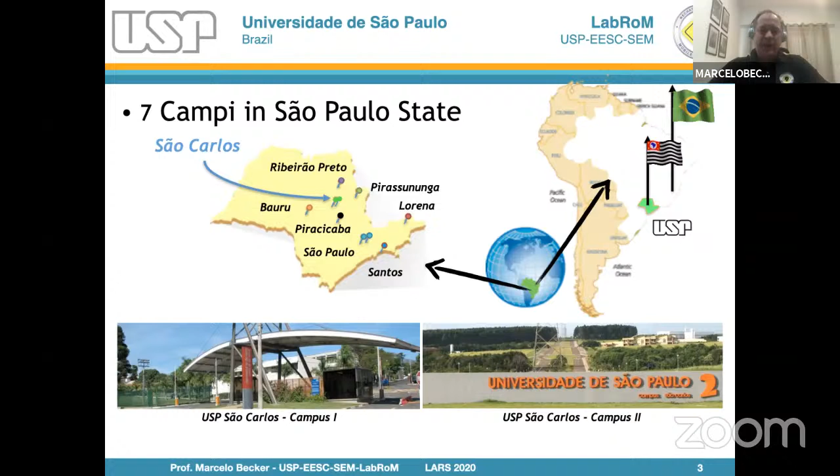Okay, so I'm from University of São Paulo. In the beginning of this presentation, you showed just a little bit of our group, so you can know that we are not in São Paulo City, we are in São Carlos, in the countryside of São Paulo State. We are like the rednecks. São Carlos is a very nice city, and we have around 30,000 students in the city.

And the most important thing is that we have a very nice ecosystem for innovation. This is great for us at USP and Federal University of São Carlos and so on. We like these transversal projects, and my group especially works very close to the Optics and Photonics Institute, CEPOF, from the Physics Institute. We are a technology pole, and many projects relate to innovation, lots of startups and so on.

I just want to show you that as São Carlos is a smaller city when compared to Campinas or São Paulo, things are very close, and we can work together easily with places like Embrapa and the Federal University of São Carlos. Here's a zoomed view. It's nice because if I want to have a coffee with my colleagues at CEPOF, it's like a 5 minute walk. To Embrapa it's like 10 minutes, and we can share ideas. And you know, coffee is very nice for good ideas.

Okay, so CEPOF is very important for us. It was a great opportunity for our mechatronics group to work together with CEPOF. Professor Vanderlei Bagnato is the chief of this group, and we work in this innovation area, trying to take this instrumentation to the fields and to apply them.

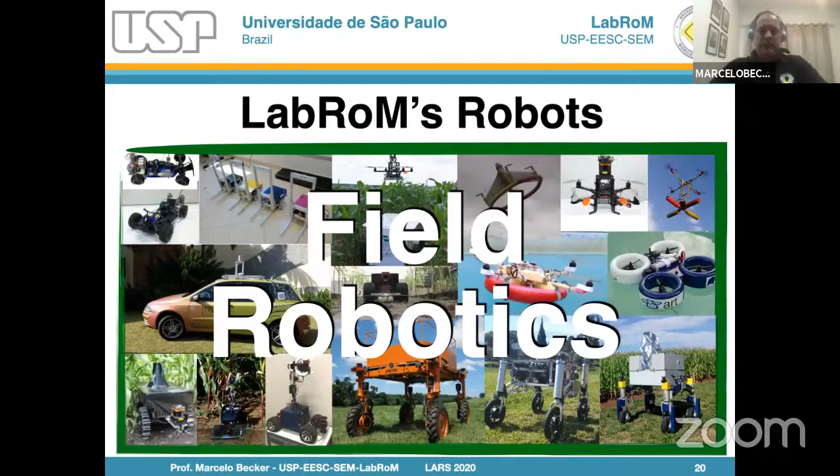And finally, what we do. In my group, we really do field robotics, and that's not easy. It's very hard to leave the lab, to go to the farms, or to run experiments in an outdoor environment. Most of you know that it's hard, but it's such a pleasure to have the students working together and getting good results.

Why do we do research focused on agriculture? Maybe the most important point is population growth. Today we have around 8 billion people living on Earth, but in 2050 this number will be very close to 10 billion. We need to feed everyone. According to the United Nations, we need to increase our food production a lot in the coming years to feed all these people. And increasing production doesn't mean increasing the production area, we need to increase productivity.

And we need to take into account climate change and environmental issues as well. In this scenario, robotics comes as a very important player. 5 years ago, we had around 800 million people who couldn't get enough nutrients to have a healthy life, and this must change. Otherwise, we are going to have big problems in a few years.

And it's not only about that, but also about business. Agribusiness is very big, very important in Brazil, so you can see the numbers here. I'm not going to go into details, but it's important to highlight that although Brazil produces lots of crops and grains, we need to import lots of goods to increase our productivity. So somehow, finding ways to improve and optimize the use of these goods would be great.

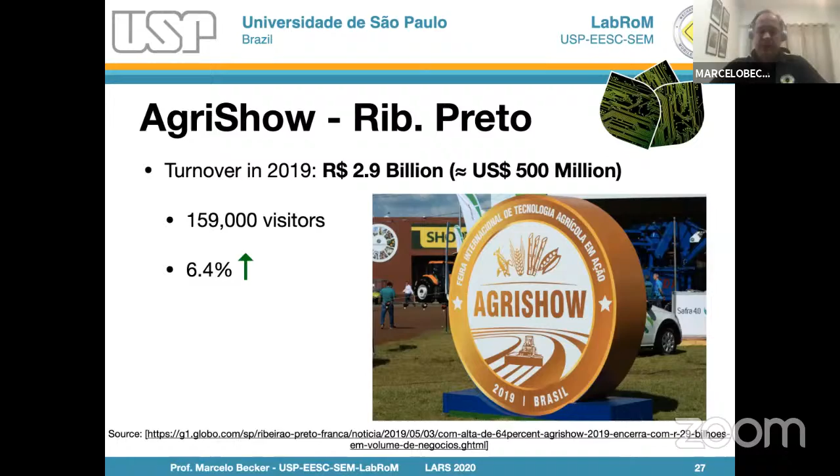Business also—we have in this region of the countryside of São Paulo State, Agri Show, the biggest demonstration and festival in this area in the country. Like in 2019, we had 2.9 billion reais in business, selling machines and other things. This year, unfortunately, we didn't have it. 2020, we didn't have Agri Show.

So I'm going to show you some difficulties that we can find in this area in agriculture robotics. First of all, we would like to have something like this: my scenario, I have some robots that are docked. I can provide energy for them using solar energy, send all the data to the cloud, process the data, and have feedback for the robots. I can connect everything. So this is what we would like to have. It's gonna take some time.

Probably in a few years this is gonna be a reality. If you have experimental farms where we are developing research, this is feasible to do. Here in São Carlos we have an experimental farm from Embrapa instrumentation, and like in ESALQ there are other experimental farms too. We can provide this infrastructure in these research farms, but it's not what's going to happen in the fields. If you go to Mato Grosso, Goiás, or other huge states in Brazil where we are producing lots of crops, it's not like this. So we need to increase and provide good infrastructure to have this scenario.

Taking into account this article from the Center for Digital Agriculture at Illinois University, we have here the levels of autonomy for ag robots, from level 0 to level 5. Today we start at level 0 and we are increasing the level. Level 0 is full manual teleoperation of the robots.

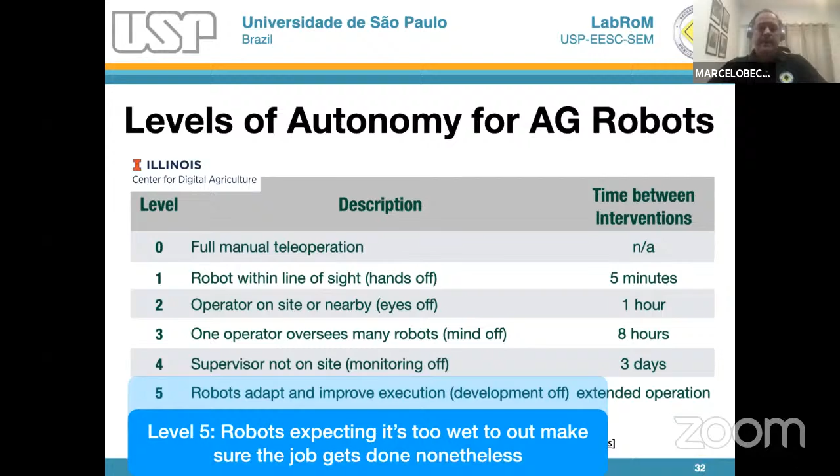But in this area we have some difficulties—let's say some possible obstacles. You can have power transmission towers, another vehicle in the middle of the way, buildings that were not mapped. Because of rain, you can have mud, erosion, and things like this that you need to adapt your path planner for, and so on.

So you can't count only on GNSS data. You need to have a good perception system to look around, check what is happening, and take decisions. We can also have people walking around, other machines, animals, and uneven terrain. That's sometimes very difficult to overcome.

In addition to this, take as an example adverse conditions: the sunlight brightness changes during the day. So when the sun is rising or setting, or in the middle of the day because of clouds, lighting conditions and brightness change a lot. You have the weather conditions and so on—you can have fog. And if you want to have a robot that can work 24/7 autonomously, you need to take this into account.

Another challenge is that every kind of crop has its characteristics. They differ not only in size and shape, but also in the way people plant them, so you need to take this into account too. Many times you need to design a robot that will go to the field and check what's happening when the crop is small, and as it grows, you need another robot because it can't go there anymore. So there is no Swiss knife that can solve all your problems. I like to say robots for agriculture can't be a Swiss knife, otherwise they'll be way too expensive.

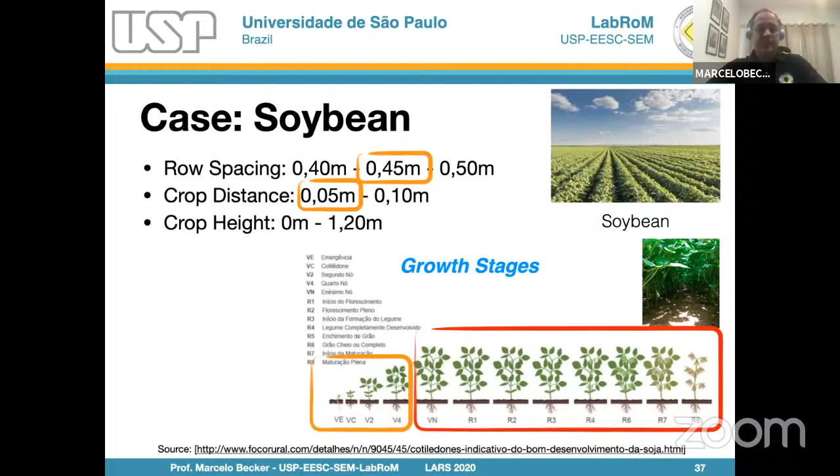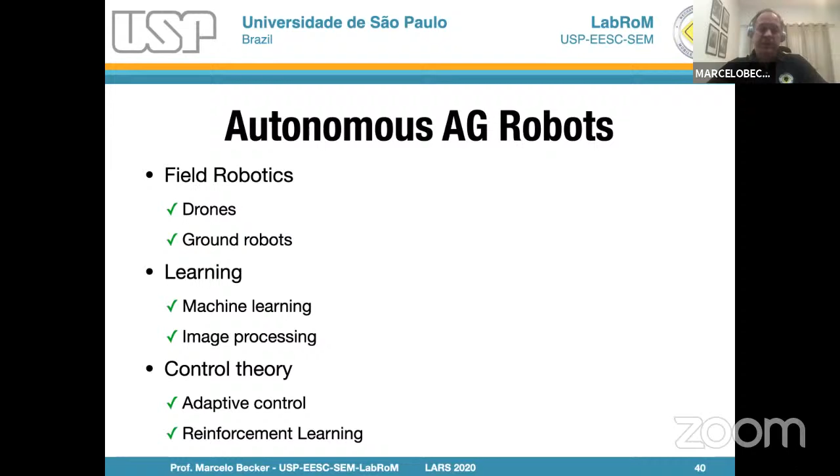So to have an autonomous AG robot, we need to think that we are dealing with field robots, drones and ground robots. We need lots of effort to develop learning systems, machine learning, image processing, and lots of control theory, adaptive control, reinforcement learning, and so on. You can see that we are full of challenges, and we should not forget the costs associated with those robots.

And I see not only challenges, but also opportunities. So it's really necessary to think about teamwork. It's not only a mechanical engineer, electrical engineer, or computer science person — it's teamwork. We need everybody working together to face these difficulties.

So some companies are working on this. I'm not trying to advertise any company, I just tried to get some big companies developing such systems, like Case. In 2017 they showed the world this, I believe the first autonomous tractor. You can see there's no place for a driver. Up to now, as far as I know, it's not on the market, but that was 3 years ago.

And John Deere did the same last year at Agritechnica in Hanover. They launched this tractor for farm automation. Here you can see more pictures — it's a big, very powerful tractor, and again no seat for a driver. So it runs autonomously, with lasers, IMUs, GNSS receivers, and so on.

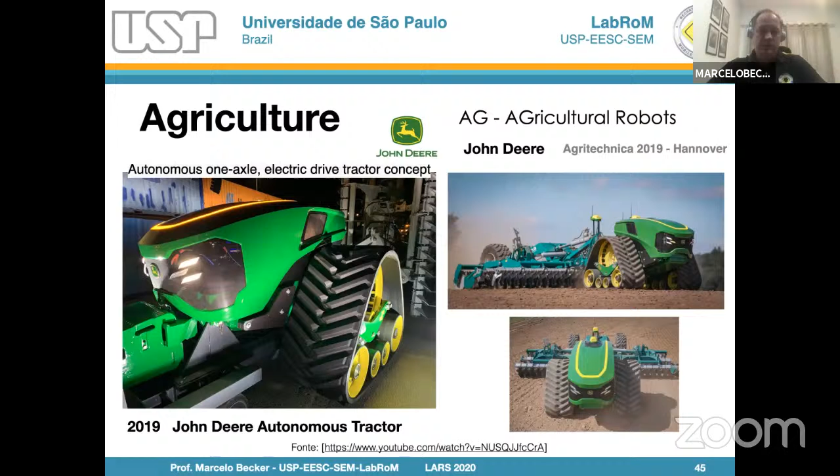But Brazil is not behind. Jacto is a great company here in the countryside of São Paulo state. Since 2011 they've been doing research with this autonomous sprayer. Sprayers are a big issue because the person driving the sprayer can get contaminated by pesticides, so it's important to do it safely. Jacto has been investing for the last 9 years doing research in this area. Last year they had a second version, and as far as I know, they are launching this sprayer for the market this year.

There are many research labs around the world; I just tried to highlight some here, but there are many more. I'm going to show you some research that my colleagues in Illinois and we at USP are doing. Part of what I'll present we are doing together, part not so together. My partner there is Professor Girish.

He's working in this agricultural and biological engineering department in Illinois, Urbana-Champaign. In my case, I've been working in this area since 2009. But my department started to develop research in this area a little bit before, in 2005, when Professor Arthur Porto started with this RAM project.

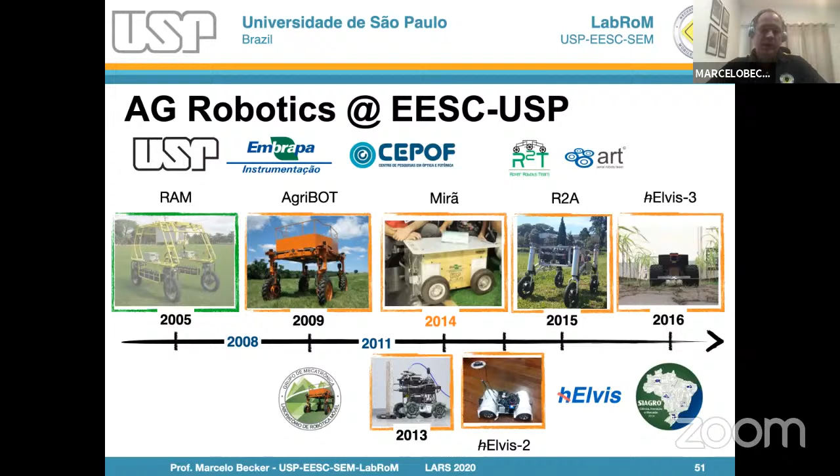So we had this Mirã, R2A, hElvis, and in 2017 we started this collaboration with people from Illinois, Urbana-Champaign. They donated to us this first version of TerraSentia. Since then, we've been developing more and more prototypes in this area.

This year, although we were in the middle of the pandemic, our colleagues in the United States sent us a new version of the TerraSentia, the 2020 version. The last one is Agri Sphero, that's the project that one master student of the group just presented. I'm going to show you a little bit about it at the end of the talk.

Basically, what my colleagues in the United States and we are doing is very similar. We have the same beliefs. We want to have aerial robots and ground robots working together in a way that we can do inspection and maybe interventions in the field if necessary, so that the farmer can control what's happening, seeing the results using a tablet or smartphone.

And the robots must be autonomous. We can't ask the farmer to operate the robots. It should be something like plug and play, not plug and pray.

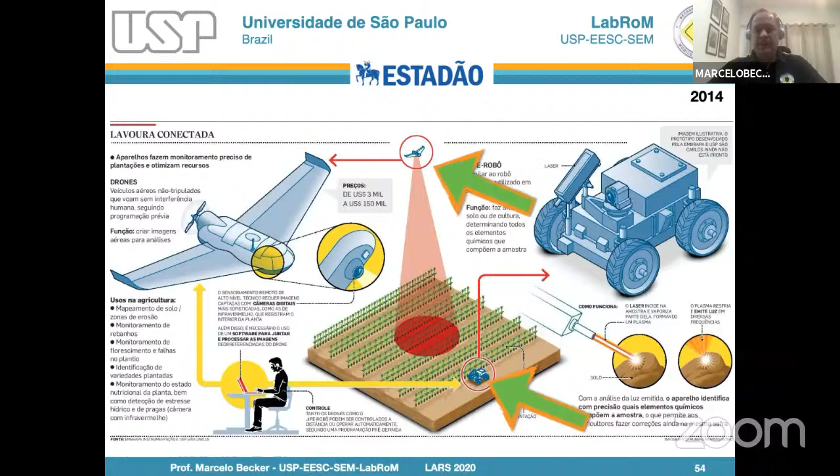So the first project, AgriBOT project, as I told you before, was a cooperation between my lab and NEPAS, Núcleo de Ensino e Pesquisa em Automação e Simulação, and Jacto Company. Basically, Jacto Company built this prototype, and we, in my group, worked on the controllers, the steering system, and navigation controllers.

It was a big challenge for us because, I don't know about you, my colleagues, but here in São Paulo we don't have many guys who work very well on hydraulic systems, controlling hydraulic systems. So it was new for us in my group, and we learned lots of things about this. I know there's a very strong group in Florianópolis, at Universidade Federal de Santa Catarina, but here at USP São Carlos it was something very challenging for us. Thank God, our students could do it.

After that came the Mirã project. It was just a demonstration robot. The idea was to take the LIBS - I'm going to show you what LIBS is in a few seconds - to the fields and prove that it was possible to have a portable LIBS sensor that we could get some results with, and then they could work with this. In three months, they made this box, let's call it like this. It was very low cost, just to take it to make a demo.

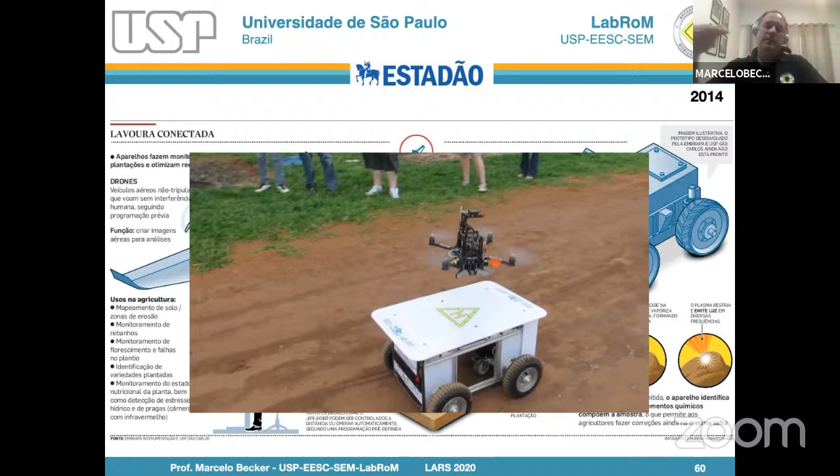Here you can see the Mirã with a quadrotor. We made the top part of the robot flat so we could use it to land and take off the drones. It was a big success for them. The idea was just to go to the experimental farm of Embrapa and show it running some experiments in the middle of a cornfield.

LIBS is this - NASA has the same sensor. I think you could see the flash. With the same sensor, you can analyze the soil without taking samples to a lab.

So you can do everything locally, in the fields. It's fast, maybe not that precise. To make it more precise, you need lots of calibrations beforehand, and lots of soil samples from everywhere in Brazil, so you can compare results and make the algorithm very good. This is Embrapa's job, not mine.

It was a very nice project. Here you can see what they get - you have that flash, and there you have plasma. So you have a way to get that image, take it to spectrometers, and analyze the quantity, the intensity of the light, and the wavelength, and say, okay, number 1 is carbon, number 2 is nitrogen, and so on. That's what they do, but this is Embrapa's job.

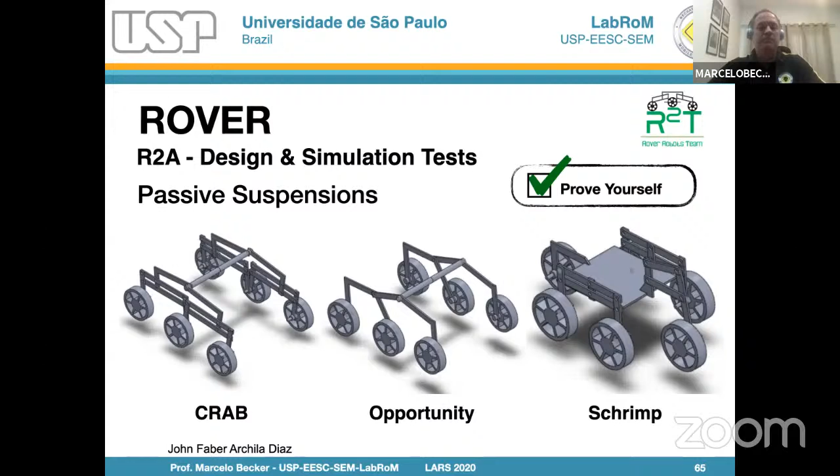They made the models, simulated everything, ran some experiments, got nice images, and checked the limits. It's nice to have a rover with 6 wheels.

In the end of this research, I was a little disappointed because I was expecting to have a rover with 6 wheels in my group, but they gave me just 4 wheels. But they could prove to me why - they ran experiments and showed that for our application, it could be a simpler, cheaper solution.

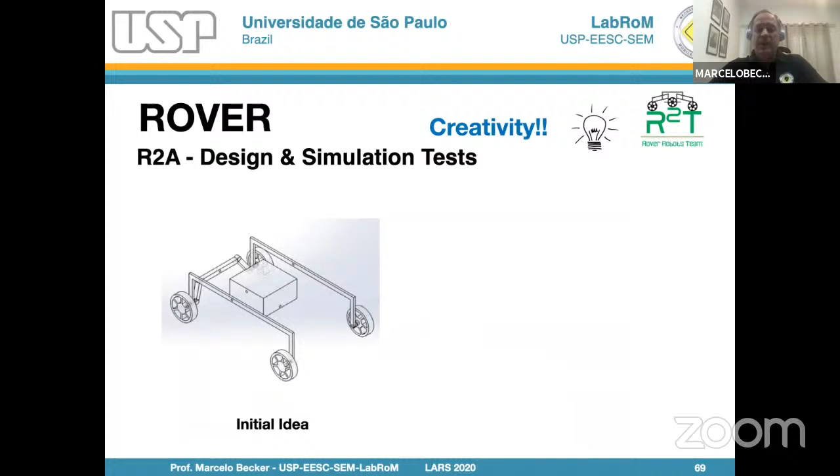So we started with this initial idea and evolved using very low-cost motors - these Bosch motors for the windshield wiper. We could control them, and it evolved a little bit up to the moment we had this - the first prototype draft.

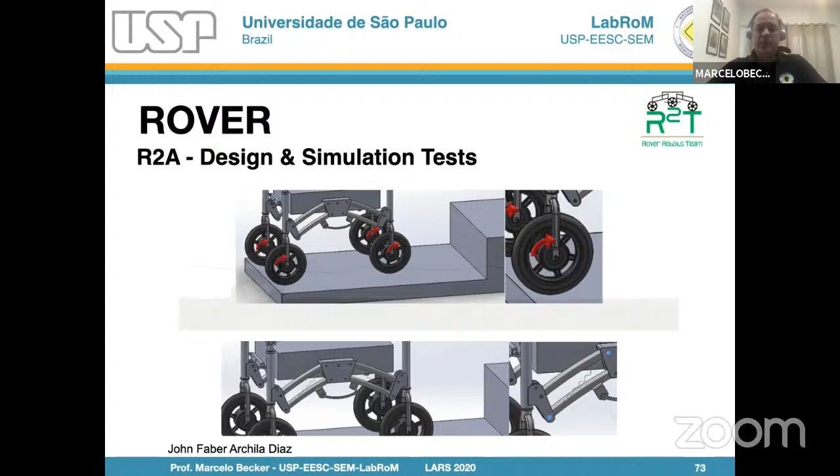From the initial idea to the first prototype draft, we could make it. It was John Faber's PhD dissertation, and then he made the prototype. He ran some simulations before to prove that it was stable enough for what we want, and then the first prototype.

As I told you before, it was very low cost. So the performance wasn't very good, but we could see what's happening and check what we would need to do to improve that very first prototype. This was in 2016, 4 years ago.

Again, we could prove that we could do a good job. So we got more financial support, a new budget, and evolved from R2A to Miran 2. It was like a medium-term project.

The idea, it's a long-term idea, what Embrapa would like - and this will depend a lot on the developments in the LIBS sensor - is to optimize the use of agricultural inputs. It means we need to quantify macro and micronutrients in the soil, and the idea is to avoid sample handling.

I don't need to take it to the labs - makes life easier. Doing so in the field, locally, I can get geo-referenced data. So I can have like a 2D map of the environment and check which element I need to put where, to have a better soil for the crops.

Another thing they would like to do is have early detection of disease vectors and agents. But this is a little tricky to run experiments because we can't let the diseases and vectors spread in the field, otherwise we're going to have a big problem. The idea is, in the future, to have a kind of greenhouse where we can run this with everything necessary to keep safety.

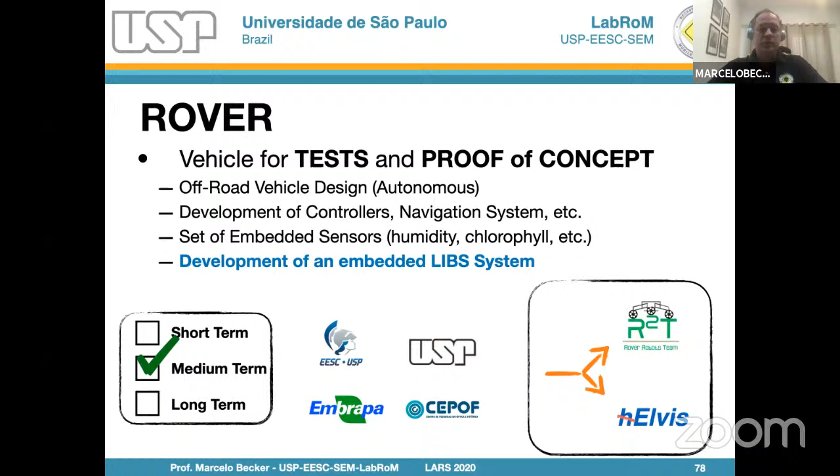To do so, we divided the project into two sub-projects. A group of students worked on the design of this new rover, and another group on the Elvis project that would develop the first controllers. For the robot design, we used well-known tools like SolidWorks, MATLAB, Simulink, Inkscape, and modeled the robot. We ran some simulations, and this was nice because in the beginning, the students wanted to run the entire robot.

I told them, no, just one wheel first, steer the wheel, drive the wheel, and then you think about the whole robot. Otherwise, you're going to have so many problems, and you never find where the error is.

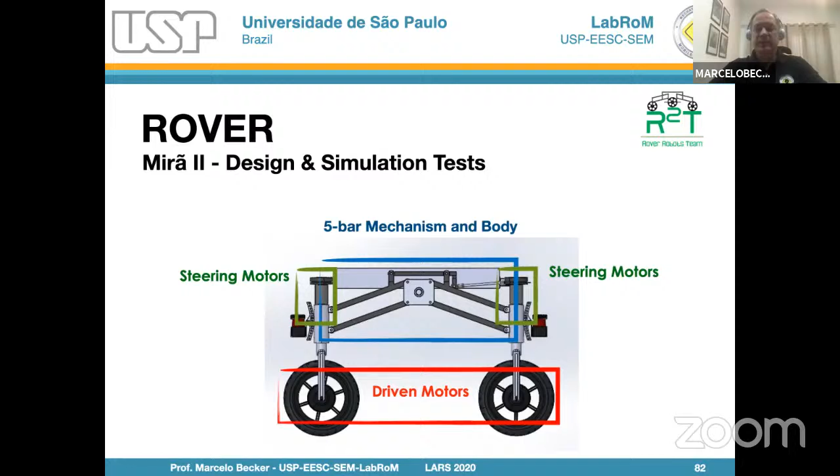And we went to Adams later, so we needed to model this 5-bar mechanism body, the steering motors, the driving motors, and we needed to decrease the complexity of the model to make these simulations using Adams.

Here's just an overview of the model. And then we could have some things like this, where you can see the very stable behavior of the platform. I always wanted this because I was thinking about drones landing and taking off on top of the robot, so we could have this collaboration between aerial and ground robots.

After the simulations, we needed to decide the components. So we went for EPOS and Maxon motors, EPOS drivers and Maxon motors. We used the Advantech computer and all these connections to make it work.

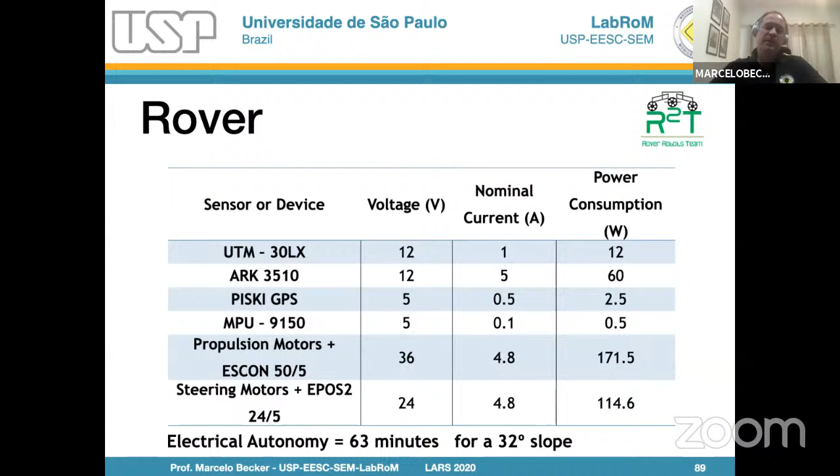In the end, we estimated we would have an electrical autonomy of 63 minutes if the robot was going uphill on a 32 degree slope. It's good, because usually here in São Paulo state, the area is very flat. We don't have such a slope.

I'm going to skip this because this is the mechanical parts. So in July 2018, we have this new version of Mirã II, the new rover.

At this moment, the LIBS sensor is not embedded yet. They were developing the LIBS at Embrapa and at the Physics Institute, but we could start to run some experiments. The size of the robot is 1.10 meters by 1.10 meters, 1.20 height.

This is because we decided two years before that we would work with soybeans. So taking into account the distance between the plants, we developed this robot. Here you can see all the pictures of the robot in the workshop when we were assembling everything.

And this is the LIBS sensor that we would embed in the system. And this is something that we really needed to work on.

To get a better view, we couldn't rely only on optical fibers because the flash of the laser was very close to the ground. It's like 65, 70 centimeters away from the sensor, and they needed to use a telescope to get a better image.

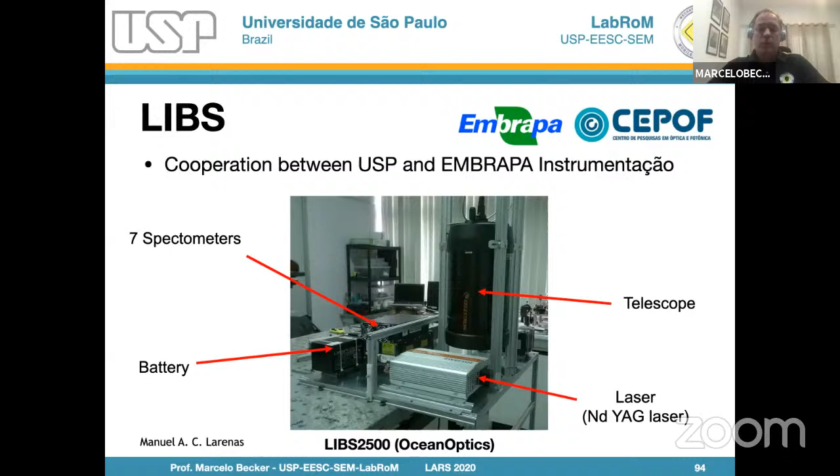Some pictures here for you, and those are the guys that were working on the robot: Andrés Baquero, who was the leader of the project for the mechanical, electrical, electronic part, and Manuel Larenas, who was working on the optics. Here, I hope you can hear the sound.

This is the sound of the LIBS producing the plasma. So that's what's happening.

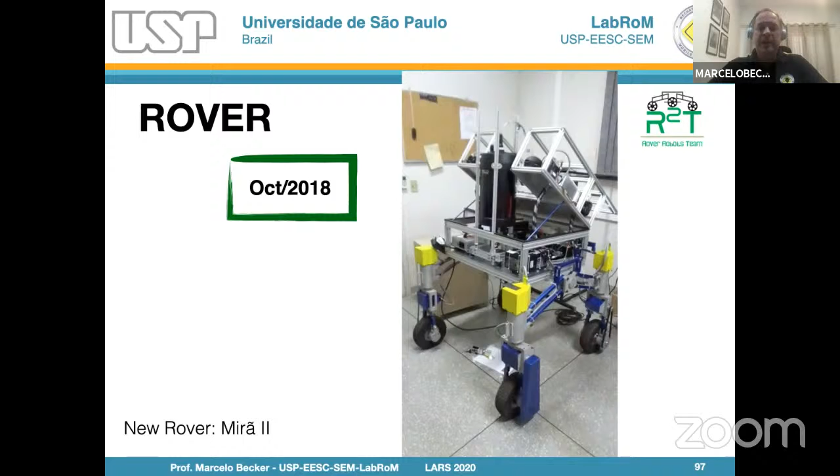Because the LIBS sensor was way too heavy compared to what we expected, we needed to change the suspension a bit. In the beginning we didn't have any springs, and we needed to change the position of the center of gravity of the robot, and this was very painful for the project. So we needed to add some springs to have better behavior of the robot in the fields.

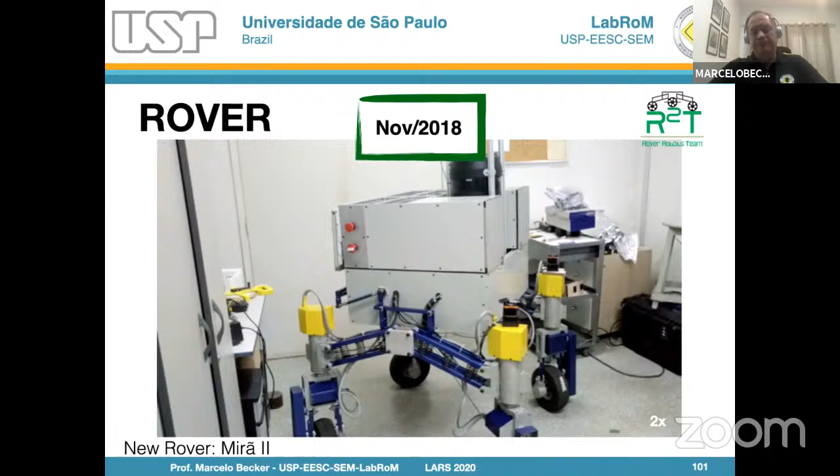Some more pictures. Here's the robot ready to go for the experiments. You can see I have 4 driving motors and 4 steering motors, so it's very easy to maneuver the robot even in small spaces.

And here's the robot at the Embrapa Farm in São Carlos City. So we can see the behavior of the robot.

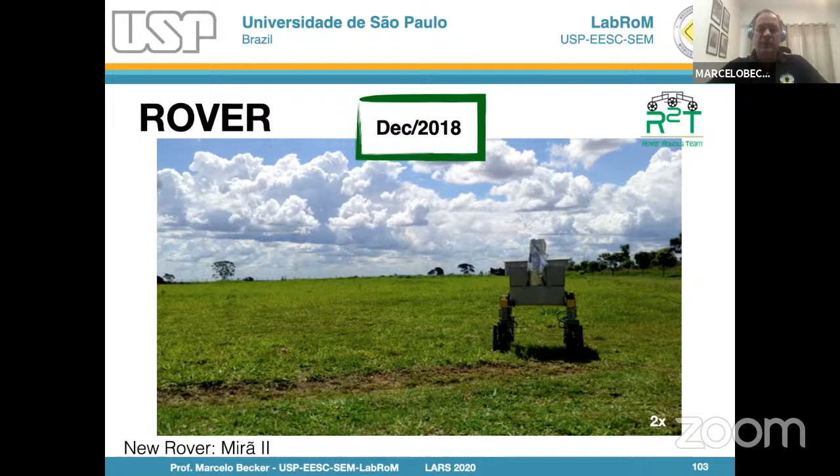So that's what I told you, that during the day the brightness changes. You can see when the sun is clouded by clouds, it changes a lot. Here is a typical environment that the robot would face. And here you can see the problem we faced changing the position of the center of gravity.

The first time my students showed me this video, I was like, oh... but thanks to the springs and the passive suspension, it worked. Just after this it stabilizes and we can continue.

So in January 2019, we start to run some experiments. To run experiments in the farm is not that easy. You need to do everything in advance, you need to plant the crops, and doing so, we still face some adverse conditions. We didn't expect that some hares would go there into the plants, so it was a big surprise for us. We needed to build a fence to protect that area and avoid the hares going there and eating everything.

Okay, so you can see here the robot working just when the plants emerged. They're very little, and the robot passes. At this moment we were running experiments only with the navigation controllers and things like this, but later on we could add the sensors and get some results for Embrapa people.

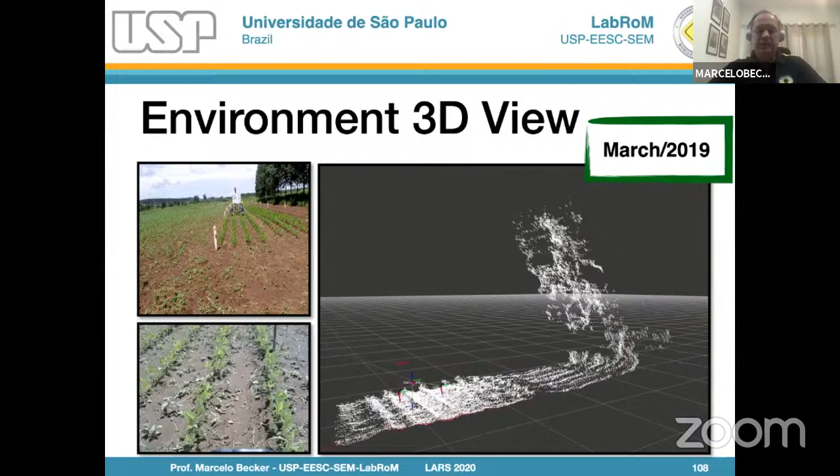So here's the laser data, reconstructing the area around the robot with the camera. In the beginning it's pretty easy to navigate there, because even in the presence of wind, it doesn't bother that much. But when the crops grow, you know, in São Carlos we have lots of wind, so it becomes more and more difficult to navigate with the presence of the wind.

So we decided to create these virtual walls that change the distance between them as the wind blows. You see the walls changing position a little bit - you have the left LiDAR, the right LiDAR. So I start to reconstruct everything to estimate where the plants are, to filter the leaves that are in the middle of the way, so I can navigate without damaging the crops. This is very important because Embrapa wants the robot to run experiments 24/7, and we should not damage the crops they are growing - otherwise their experiments would be in trouble.

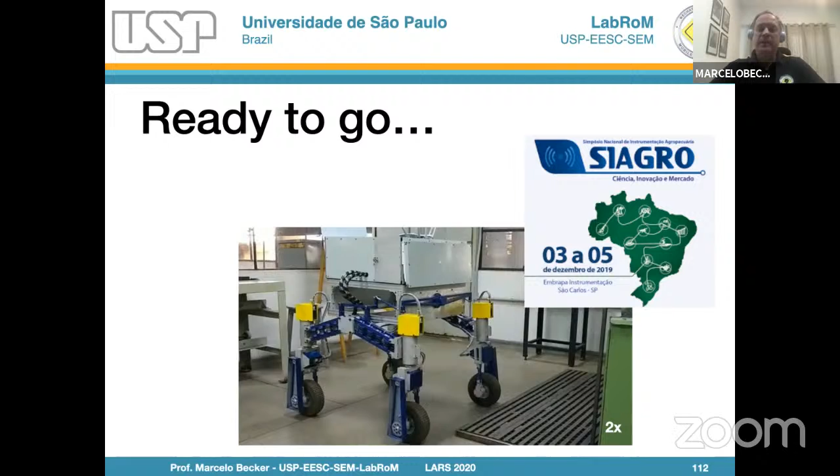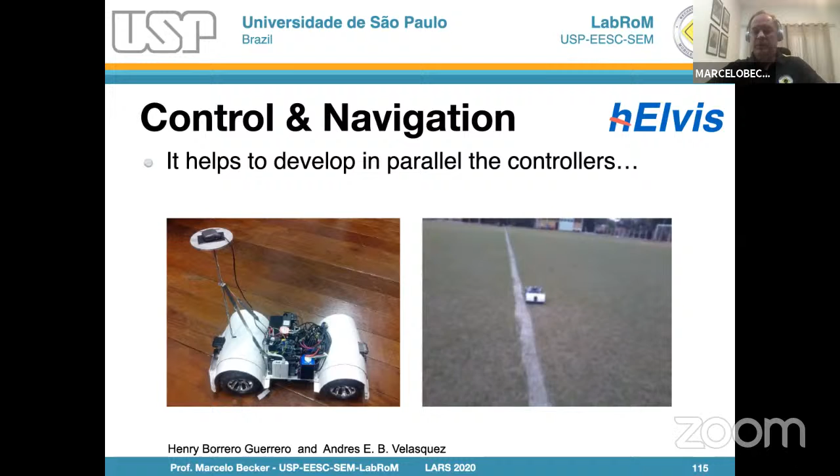In parallel with the development of the Miran robot, we used hElvis to run some experiments for navigation before Miran was ready. We couldn't wait to have the entire platform assembled to start running experiments, so we decided to use this small version, and it evolved along the years. In the beginning it was like this - we went to the lab. We didn't have a farm, so we used these pipes to create a farm-like environment inside the lab. It's easier to change the algorithms inside the lab than to go every time to the farm and find there's a problem - oh, I don't have energy, I don't have fresh water, I have the sunlight on my face - it's easier to start doing the research like this.

So in the beginning, we planted corn trees on these vases, and we could change the shape of the rows, the distance between them. For the laser sensor, we added a wood block on the bottom so the laser would detect only the crops, not the vase. So here we could develop all these algorithms to enter the row, exit the row, keep in the middle of the row. It was really nice for the first algorithms.

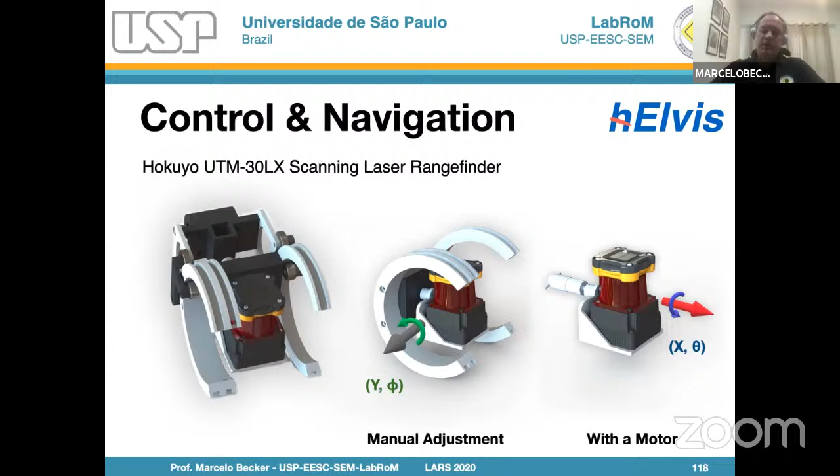We also developed these mechanical parts here to try to decrease the price of having a 3D laser sensor. We had some in our car, like a Velodyne, but we didn't want to use a Velodyne on that robot. So we got these Hokuyo lasers, and we were turning the laser in this way so I could produce a 3D cloud of the environment around the robot. It's the same robot we were using before, we just made some changes. So we had the front LiDAR and this LiDAR on top assembled on this pole, so we could have two IMU sensors, and we did all those transformation coordinates.

We went to Embrapa farm, and there we ran some experiments. It was nice to develop the filters that could take away the leaves, because when the corn is growing, some leaves fall in the way, so you need to filter those to see the area in front of you that you can navigate without damaging the robots or the crops.

Now, things we did in partnership with Illinois people. They work very much in phenotyping. They use corn as a good example of what they're doing. For the last 9,000 years, humankind has been selecting the best seeds to have the best corn. Thinking about population growth, they saw that we need to accelerate this evolution of corn and have the best seeds to feed humankind.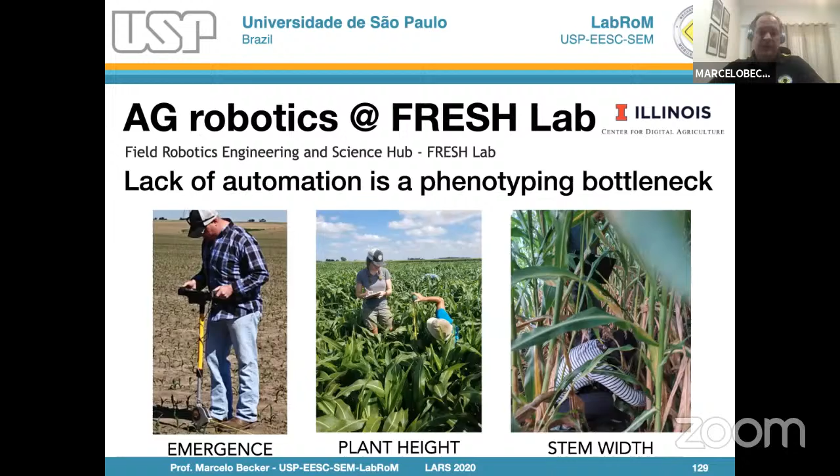They checked what they needed and found that gantries aren't that good for this kind of infrastructure—I saw great infrastructure like this in Zurich. They use some kinds of gantries. Drones, if fixed-wing, fly too high; if you use quadrotors, they fly low but shake the crops a lot, giving you a blurry image that's not that good. And when it comes to robots, you have the autonomy problem.

So here are things you can do. We're working together with them so it can operate autonomously. This version of the robot is compact, and you can teach it to do many things, like using image recognition to count the plants that are growing well.

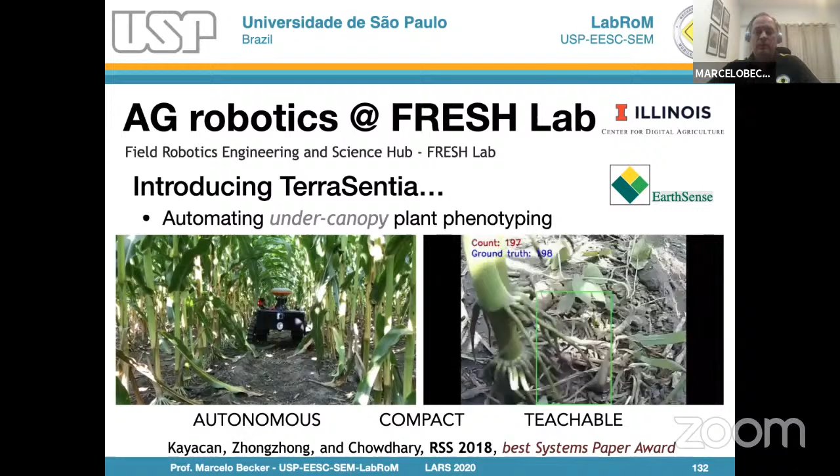In the beginning, I sent a student there—Vitor Akihiro Higuti, one of the best students I ever had. He started working with the guys in Illinois, developing this LiDAR-based autonomy under the canopy, and it was great. We got great results, checking different speeds and the behavior of the robot at different speeds, so we could evaluate the performance.

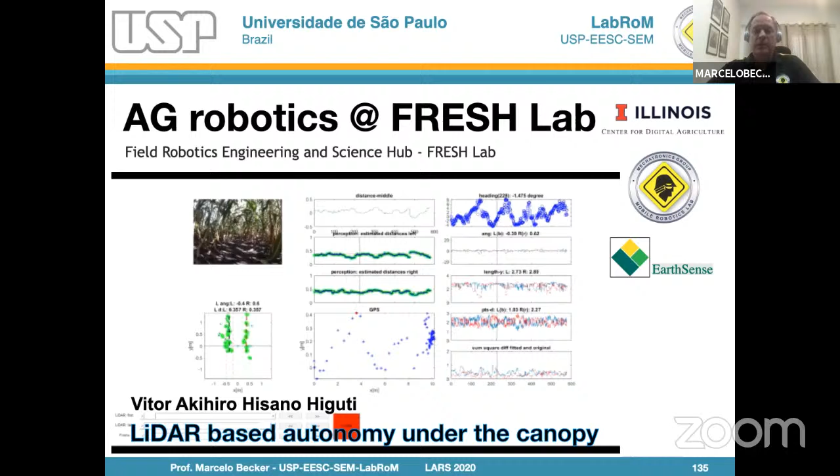We could see that we really can't trust GNSS data, so it's important to have the LiDAR. Now they're combining LiDAR and cameras too. In addition, sometimes they need a camera checking the crops up high where the seeds are, so they decided to make a version of the Terra Sentia with a pole where the camera would be on top. As you can see, that's not easy.

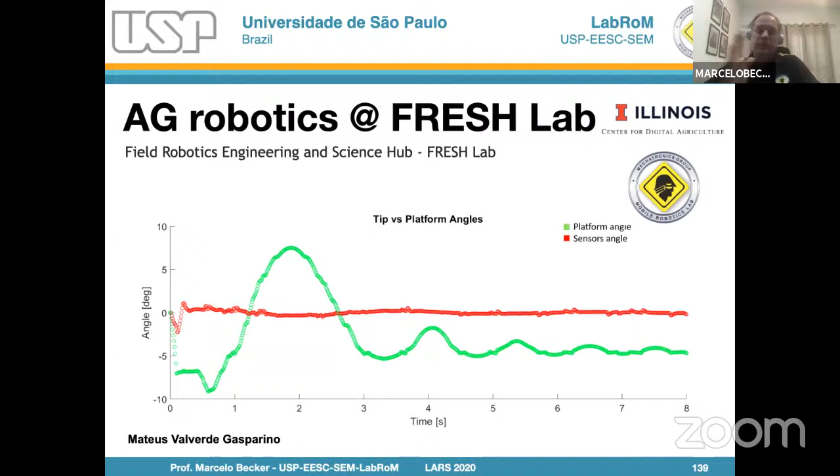When it comes to simulation, it's pretty nice—everything's flat and perfect. But when the robot is moving on the field, the terrain isn't even, so sometimes it's hard. Because of that, we started developing this mechanism so we could have a control system to improve behavior and keep the camera in a better position to get the image. Here you can see the sensor's angle and the platform angle, so we could compensate with the movement of the pole and keep it steadier.

When it comes to maneuvering from one row to another, depending on the crops, you can use GNSS without any problem. Here you can see Terra Sentia navigating from one row to the other using GNSS-based movement, so it's not a big problem.

It goes smoothly, and then to the next one. It's important to say that in this case, this robot has just 4 motors, so you don't steer the wheels. That's why it needs to take a long way, a big circle to go into the next row.

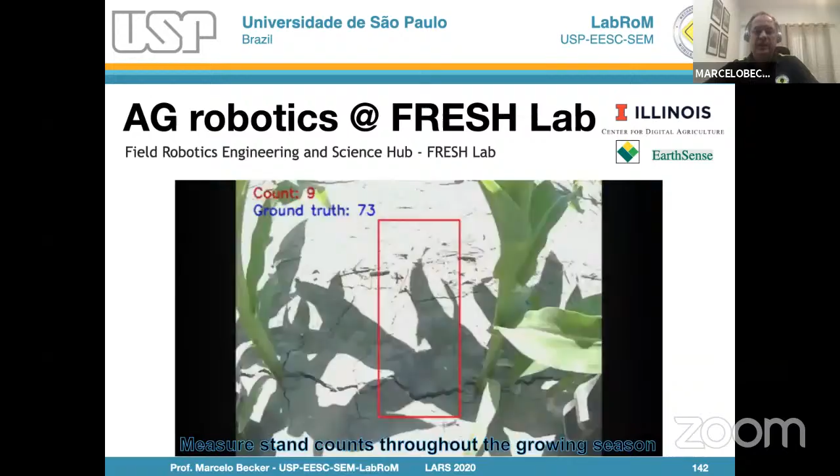And this is the situation that they're facing. You can see that the leaves are in the middle of the way, and you need to filter them. Another thing that they are doing, I already showed this before, is not only to count, but to measure the stand when the crop is growing.

So they got really good results, and in some cases, much faster than a person would do, for sure. So here, the counting plants, as soon as they emerge, you see the average error is just around 5%, so it's great. You don't need a person to do that, or lots of students.

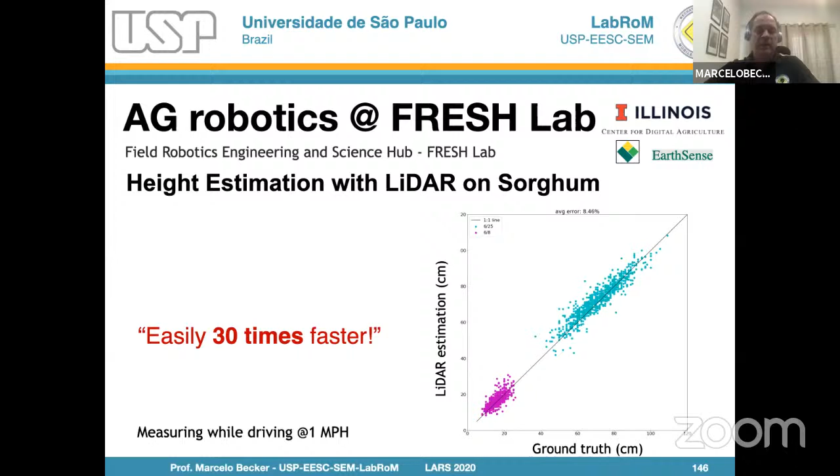And here to measure the size of the crop, you can make this 3D map, 3D view, passing through that tunnel, let's call it like this. And moving at 1 mile per hour, they could do this 30 times faster than a person would do. Okay, so it's really a great improvement for them. They use also other crops like tobacco and others.

Okay, this is stem estimation, comparing estimation done by the LiDAR and the camera. And then they can cover everything and go. Okay, so it's very close, the data that they got. Weed detection, what is not corn, so they can map this, and in the future they can spray something there to kill it, or have a kind of arm to take it away.

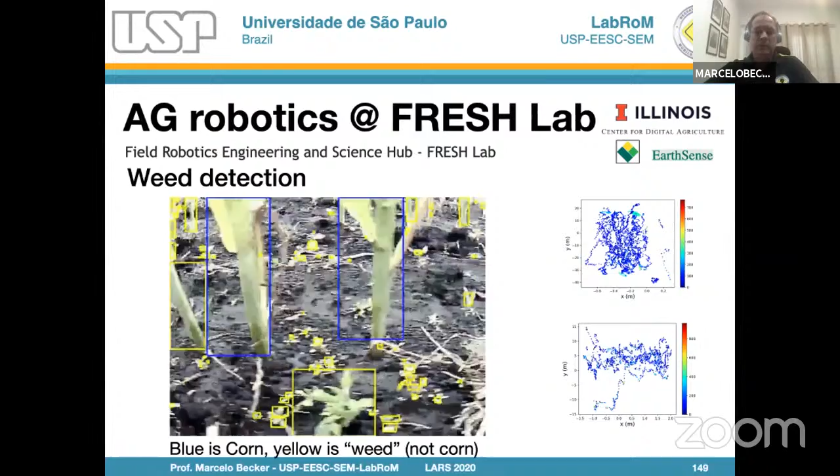And also we like to work in these simulators. It's nice because you can have hardware in the loop simulation. You can prepare everything. Everything is running on ROS, so it's pretty easy to plug and play afterwards. And it's nice because you can also think about having a fleet of those robots working together and optimizing the time necessary to check all that plantation field.

You can plan everything. Okay, so in 2017, my colleagues in Illinois sent us this first model of the TerraSentia. The second one, my students worked with them in the US, and now we have the third one that just arrived 2 months ago in Brazil.

So it's a pity that now we can't run some experiments in Embrapa Farm because of the lockdown, but my student is with the robot in his hometown, and you know, he has now tons of data, and he's working on this data, trying to finish his PhD.

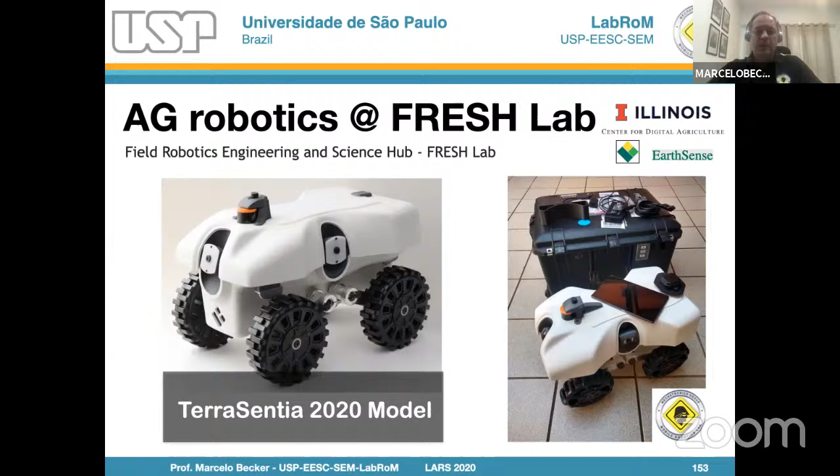Basically, the robot has the sensors: IMU, a LiDAR, cameras in the front and on the sides. You can adjust the camera position. So if you want to see something that's close to the ground, like the roots growing and to count the plants, or if you want to see something in an upper position, you can change this. You have wheel encoders and a GNSS antenna that you can use to navigate.

This is a movie that shows the robot working there, a short movie.

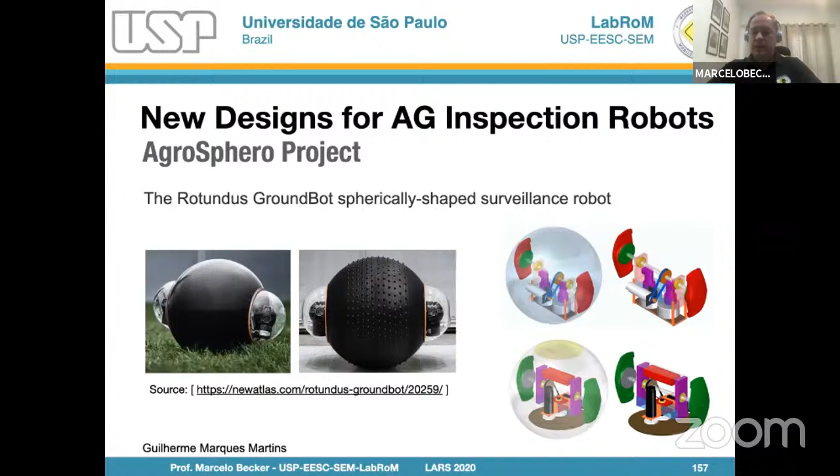Based on that idea, Guilherme started to develop a new proposal, a new design. He came up with two different designs and built both, and the last one is our actual prototype. Here you can see what's happening.

For the moment it's big, about 30 centimeters in diameter, but it was the first prototype. Now we want to downscale it and work on the instrumentation we can add, then run some experiments. This is really the first stage of the research, but it was great. Guilherme did a great job, and now he's applying for a patent for this mechanism, because he developed a new mechanism to do this.

We also work with aerial robots, the quadcopters. Not only in simulation, but my group also has helicopters, and we develop new ones. We have commercial ones, and we develop new ones because we noticed some years ago that the biggest problem with these robots is that they fly nicely indoors, but outdoors it's different.

When you go outdoors, the presence of wind is an issue—as I told you, in São Carlos we have very strong wind. So when we go outside to run experiments, the battery gets empty 15 minutes after the beginning of the test. It's too low autonomy.

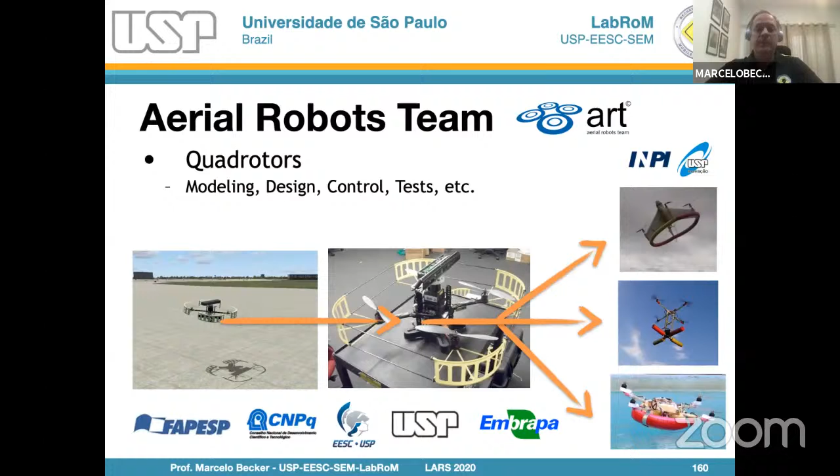Based on that, we decided to develop new designs to improve the experiment time. Thanks to our collaboration with the Aeronautics Department, it's really like an engineering project: we design it, model it, test it in the wind tunnel, and then go for flight tests. It's nice because the wind tunnel tests really change the design in the end.

Thanks to this partnership with the Aeronautics Department, we can do many things. This is another research area we have in the group, but I'm not going to go into that much in this presentation. So I'm going to the end of the presentation now, with some conclusions on where we are as a group.

We started here for sure, at level 0. The first prototypes, in the beginning, in all cases we were teleoperating the robots. Then we were almost reaching level 3. It's a period when the lockdown really stopped most of the things we were doing here in the lab, so it's going to take a year for us to be back in the race.

But thanks to our partnership with our colleagues in the US, they are almost reaching level 3 too, and it's great work that we are doing together.

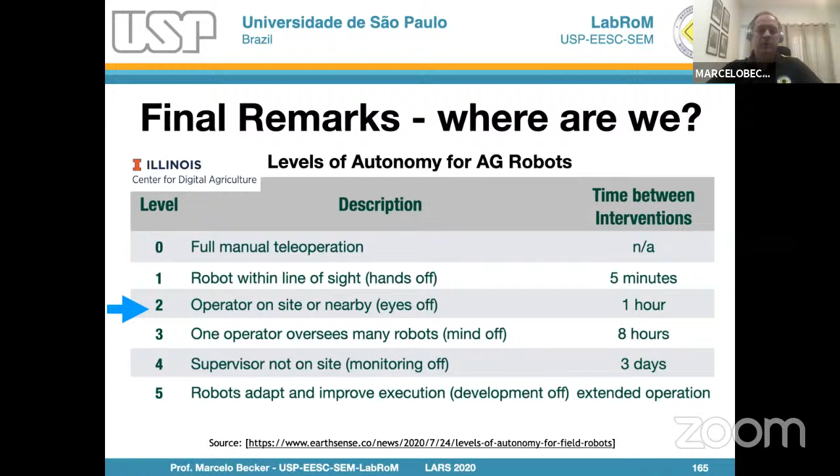Next steps: we want to work on cooperation between rover and drone since the beginning—since 2014, when we had that first box, let's call it the Miran one, we had this dream of cooperation between both. This is something we are starting now, cooperation with the rover and the AgroSphero too. It's nice to have a robot that goes to the field and then leaves small robots that can enter areas the big one can't, then comes back and shares the data. It's nice.

We are working on this embedded perception system because things are not that cheap. Some sensors are very expensive, and we need to find the balance between getting the best data and something that's not that expensive. It's always a matter of finding that balance.

For sure, navigation is one of our priorities as a group. That's why we started to collaborate with the Americans, and the students did a great job. Now, two students from the group are already there working in the US with them, and one is still here finishing the PhD. I really hope he stays here—it's Akihiro. Let's see.

And for sure, deep learning and big data, because this involves not only LiDAR but image processing, extracting features from images and mixing them with LiDAR data. We will go for deep learning to get all that data—big data—it's nice.

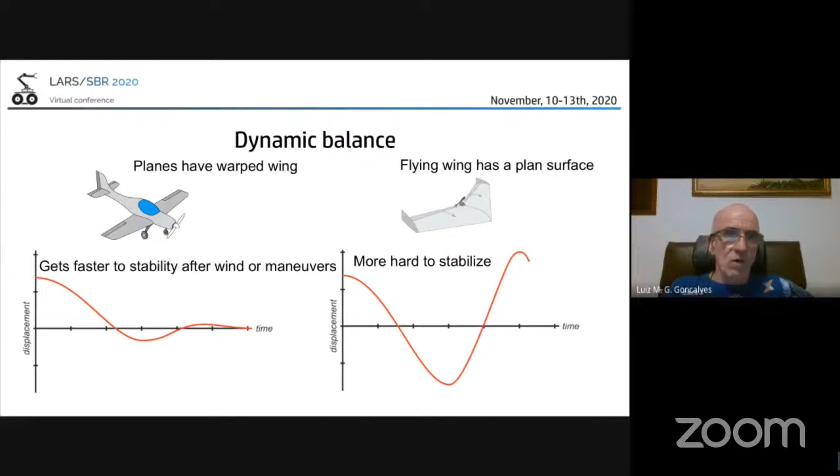So some choices have to be made from the beginning, and that's what we will talk about here. The first thing is the variation of position of the center of pressure, which is responsible for bringing stability. Once we vary the position of the center of pressure, we are also varying the attack angle it will fly at.

Here you can see that the more forward we go, the more we have the alpha angle, more to the front of the center of gravity.

We chose a flying wing with 1.20 meters. It has 0.22 meters at the extremities and about 35 centimeters in the center profile. Here on the right you can see several other measures of our flying wing.

The control surfaces that make this kind of UAV produce the desired movement are only the elevons. We have two actuators that control the elevons, which can be controlled both with the same angle.

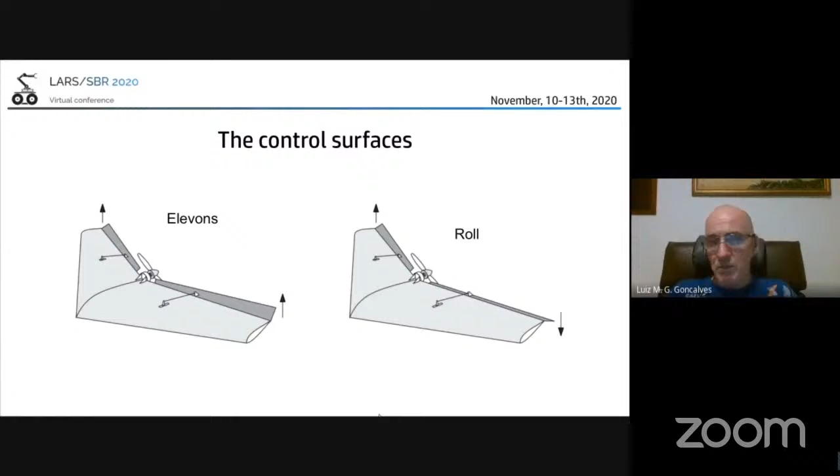In this case, it will go down or up a little bit. And if I put one elevon in one direction and the other in the opposite direction, I can produce a roll to the left or to the right, depending on what is done with the elevons.

Once we had this control surface defined, we went on to define the profile. Defining the profile is a matter of analyzing it using software. In this case, we used software to analyze the profile, and we took two profiles to be analyzed.

the Zagi 12 and the Sipkill 1.7/10. From these two, we got the lift coefficient, the drag coefficient, and also the aerodynamic efficiency, which is a division of both. We also took the moment coefficient.

In the end, we show the drag for different profiles in the center and in the extremity. I'm going to talk about this a little bit later.

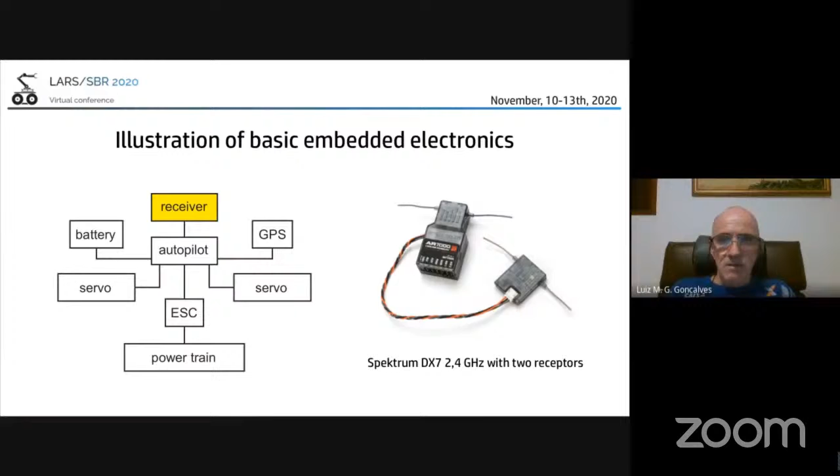This is the illustration of the basic electronics embedded in our system. We have a receiver of the Spektrum DX7 type, 2.4 gigahertz, with two receptors. The battery chosen was a LiPo battery, 2.2 ampere.

We also used an autopilot, APM 2.8, for autonomous flights. We have a GPS block, the NEO-6M, which already has a compass also. The servos used were Tower Pro 9 grams.

Since we have this embedded electronics all chosen, we put a camera too. In this case, we show here a full HD resolution. However, we have done another one that comes together with an autopilot that can substitute this previous one. The camera goes together. In this case, we just put the camera for taking some pictures with that resolution.

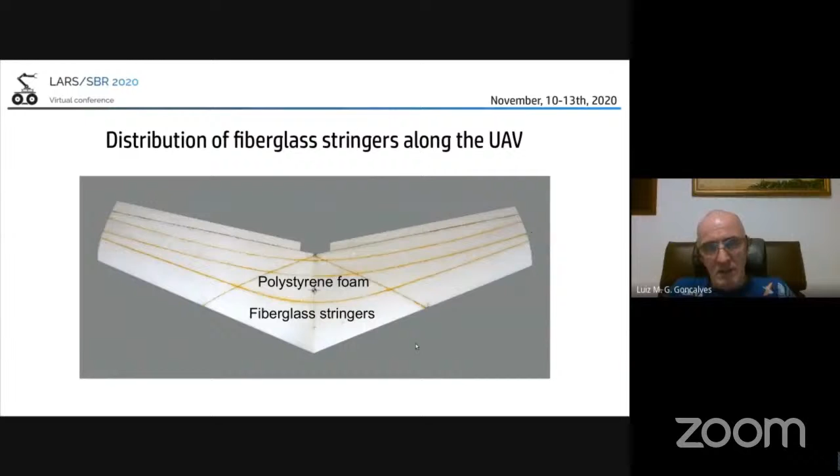So once we had those materials, we went to do the construction properly. This is the wing composed of polystyrene foam, and we have put some very thin fiberglass stringers in order to give more stability to it.

The profiles, as I said previously, in the center are different from the ones in the extremities, different just in the twist angle. This twist angle guarantees that the stability in the extremity is kept. If something happens, at least until it gets the stall, the stability at the extremity will be kept, even if losing stability in the center. This is a good choice. In general, people do that.

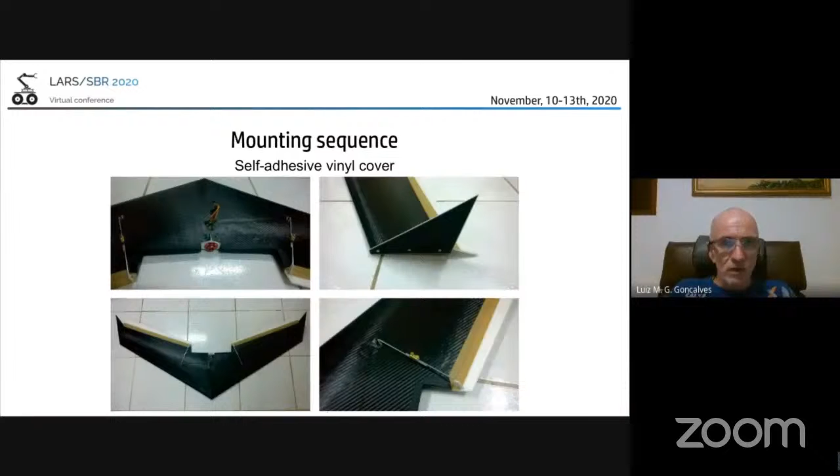Our wing was covered with a self-adhesive vinyl cover, and then we put together all of the embedded electronics on it, and then Alison went to test it.

In order to test it, we use the mission planning software. We are going to do some autonomous flight in order to see if it works well, and the stability correction that we have put on board is the main contribution here. We are going to see 3 modes of operation on it.

The first one is without autopilot, controlled by hand using this radio. In the second mode of operation, it uses the stabilized autopilot, and we did a third one just with the autopilot without the stabilization.

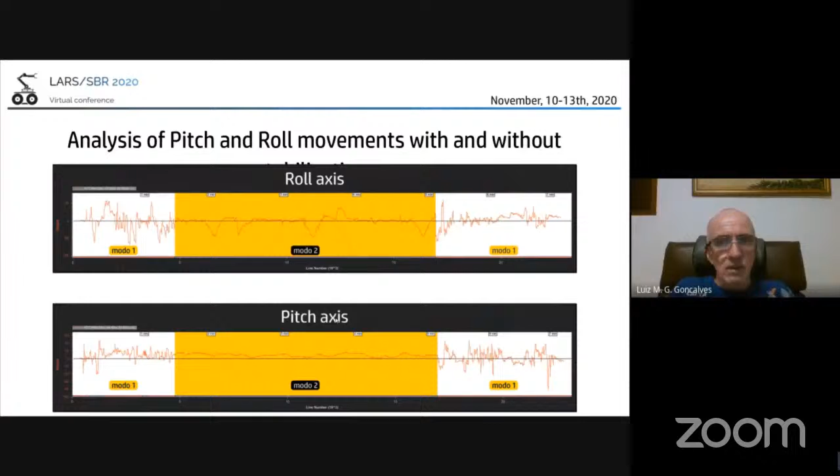Here is an analysis of the pitch and roll movements with and without the stabilization. We can see that with stabilization, it is much better. Here is mode 1, here is mode 2 with stabilization, and here it gets again to mode 1 without stabilization. Here is the roll and here is the pitch axis.

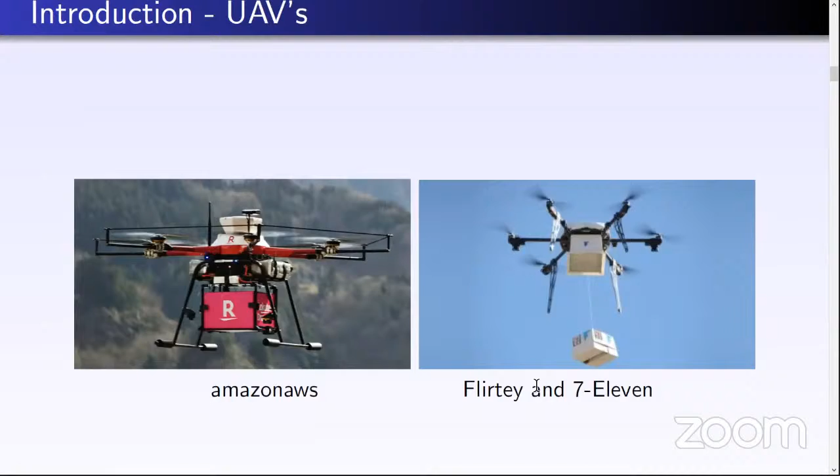We can consider that the evolutionary algorithm has four phases: initialization, selection, genetic operation, and finalization.

The proposal was to build the scenario in the Coppelia simulation environment and test the EA for this. We divided it into 3 experiments that will be explained below. Basically, the EA defines some routes and at random tests the routes using a distance fitness, takes the 4 best routes, and performs crossover and mutation on top of these results, thus generating new descendants called children. The process is repeated until the stop criteria is satisfied.

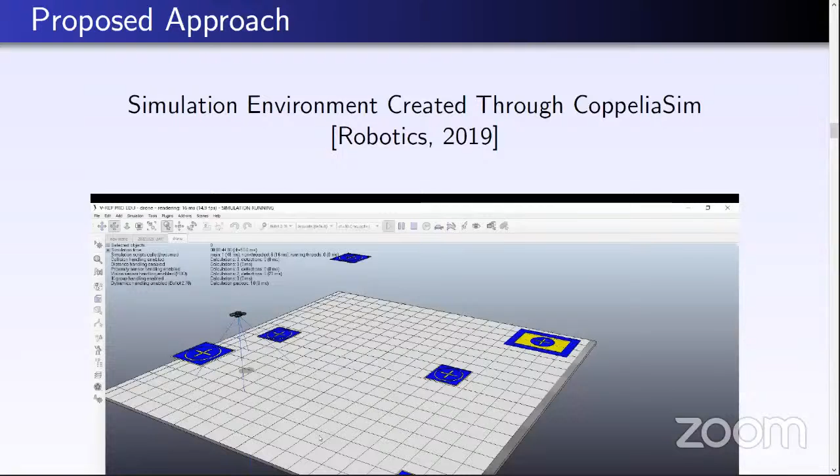Experiment 1: In this experiment, the fitness function was designed to consider the computed Euclidean distance between the platform sequence represented by each individual of the population. After completing the training process, the best sequence of platforms was sent to the quadcopter for execution and evaluation. This experiment represents the classical approach for the traveling salesman problem, adapted to the aerial vehicle scenario. The algorithm focuses on the shortest path without considering the quadcopter's dynamics.

Experiment 2: The shortest path between platforms is not necessarily the same as the shortest trajectory for a particular quadcopter. This experiment incorporates elements such as the vehicle dynamics and the quadcopter controller into the evolutionary approach. In this case, the fitness function computed the integral of the quadcopter position, sampled by the simulator over time, and the trajectories performed.

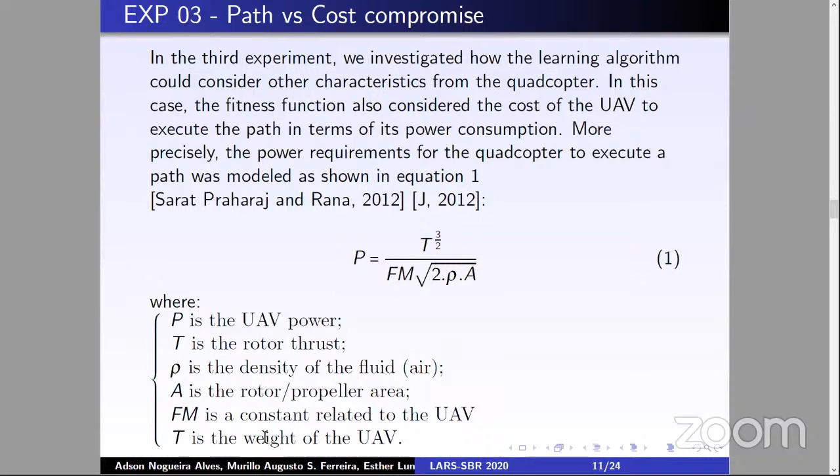Experiment 3: In the third experiment, we investigate how the learning algorithm could consider other characteristics from the quadcopter. In this case, the fitness function also considers the cost for the UAV to execute the path in terms of its power consumption. This is the equation used for this.

The Euclidean distance was the only parameter considered by the fitness function. The generated path does not consider the quality of the flight. It was shown that the best path was expected to be reached if displaced about 24.6 units. For this example, the true trajectory executed by the quadcopter measured 25.5 units, 4% higher than expected.

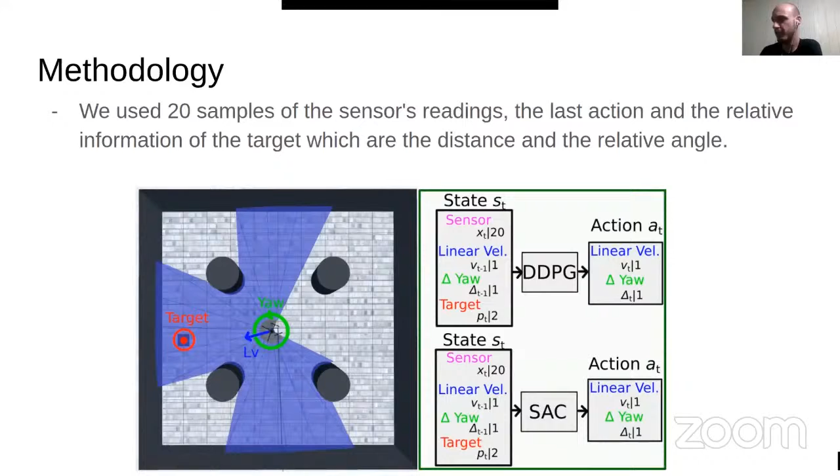The laser samples come from a simulated LiDAR with 270 degrees of range, equally spaced at 13.5 degrees. The action provides the linear velocity and the variation of the robot's yaw. We set up the robot's X and Y velocities in the Gazebo simulator by converting these actions, which are in polar coordinates, to the Cartesian coordinates of the Gazebo simulator.

The network of both agents has 24 inputs: the 20 laser samples, the previous linear velocity and previous delta yaw, as well as the target distance and target angle, while the output provides the linear velocity and the variation of the yaw angle.

For the DDPG-based approach, we set up the actor network with 3 hidden layers of 500 neurons each, activated with the ReLU function. For the linear velocity output neuron, we used the sigmoid function with limits ranging from 0 to 0.25 meters per second. For the delta yaw output neuron, we used the tanh function ranging from -0.25 to 0.25 radians as limits.

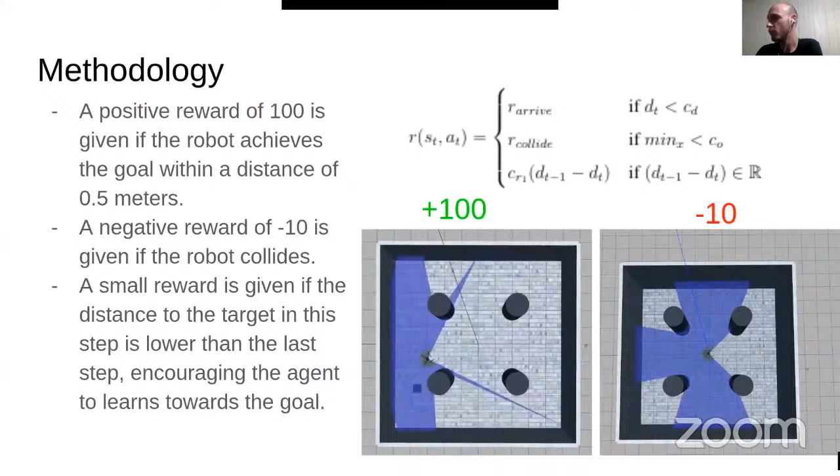We set a limit of 500 steps per episode and trained with randomly generated targets. We trained the agents for 1,000 episodes in the first scenario and 5,000 episodes in the second scenario.

The results: we performed two tasks to evaluate our approach. In the first one, the agent should navigate from a starting point to a specific target.

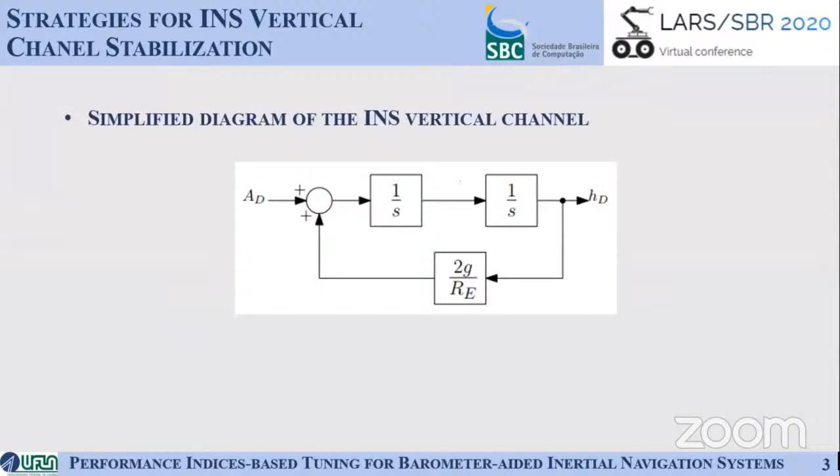Strategies for INS vertical channel stabilization. In this figure, we represent a simplified diagram of the INS vertical channel, where AD is the inertial sensors measurements, HD is the output altitude, and 2G over RE is the gravity contribution. As we can see in this figure, the main reason for the instability of the vertical channel is the positive feedback. To solve this problem, three different mechanizations are going to be studied.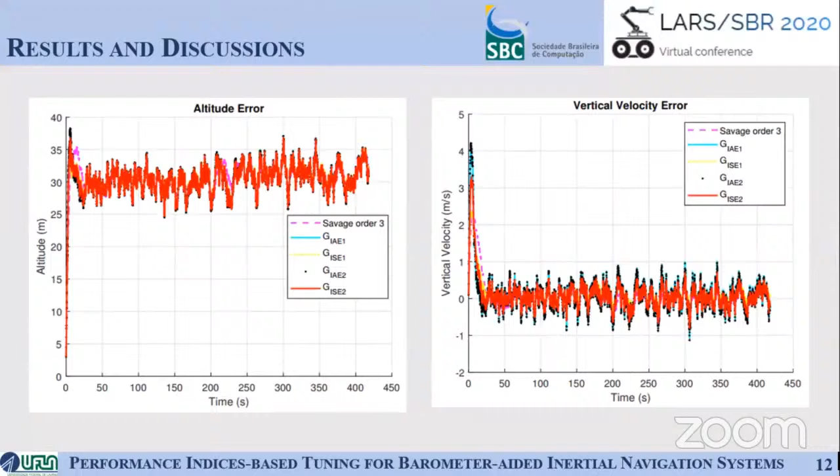As you can see, the error in altitude and error in velocity, the difference between Savage and the tunings we calculated is very small. We can confirm this looking at those two figures: on the left, the altitude error, and on the right, vertical velocity error. It's almost impossible to distinguish the values from Savage and the tunings we calculated, because the values are almost the same.

Conclusions. In this article, we studied mechanizations consolidated in the literature, and we analyzed 6 different mechanizations, 2 of Ciolis, Tittle, Becker, Rogers, and Savage. We simulated them to pick the best one.

Also, we studied performance indices IAE, ISE, ITAE, ITSE, and for each criterion we calculated the set of gains, and also simulated searching for the best set of gains.

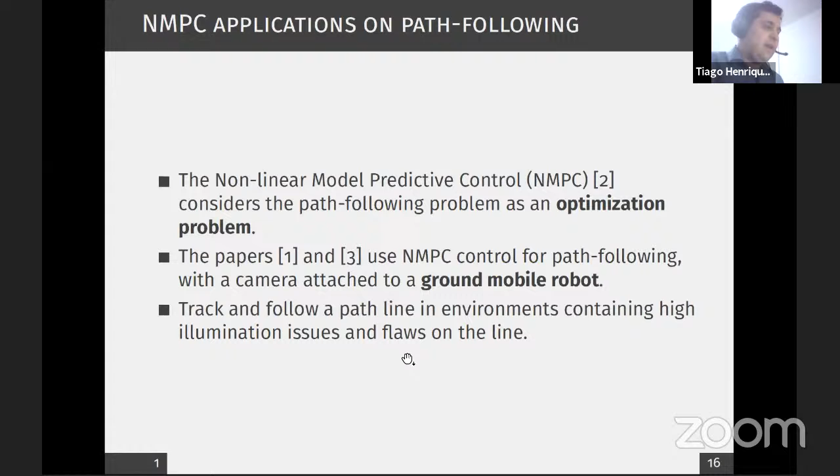My main objective in this paper focuses on utilizing a standalone NMPC controller and NMPC combined with a PID, whose functionality is to smooth control actions and oscillations, just to help the NMPC. We use both techniques together.

This paper also addresses, as stated before, failures and flaws in the segment caused by light, illumination, and so on, and we use a calculable virtual trajectory to help with path following failures. We also propose a variable linear velocity profile based on track curvature, allowing the UAV to complete the task in less time while reducing errors.

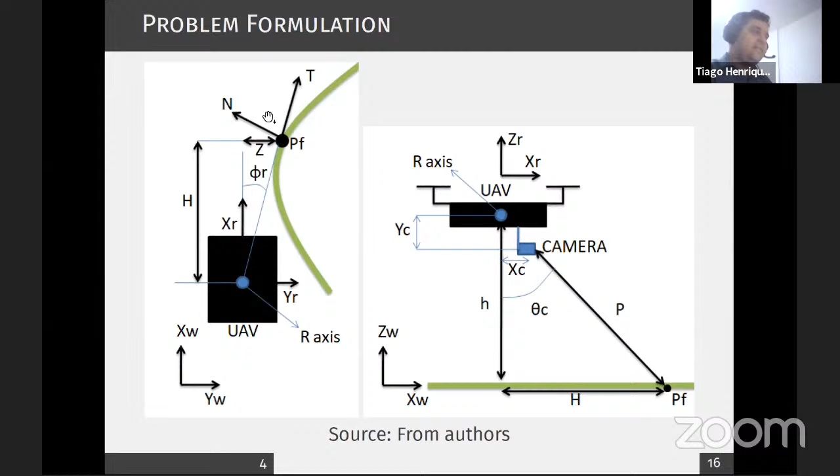For the problem formulation: x dot, y dot, and phi dot, using this equation with cosine and sin. For linear velocity we state u, v, and k, related to x, y, and k is the pitch rate from the UAV. R is the main control action we use here, the yaw angle rate, which will be used to control the UAV.

We applied equation 1 to a reference system SF, related to the tangent vector and normal vector stated before, and we get z dot as equation 2 and S dot as equation 3. Z is the lateral side error as stated before, and phi r is the important angular error for the UAV, related to the center of the camera, the point PF.

We use the trajectory curvature C, calculated by equation 4, as shown here. We use the point PF, the center of the camera, standard 0, and two neighbor points to calculate the curvature estimated from the obtained image. Equation 5 can be found in the literature, it's straightforward, and we arrive at this equation.

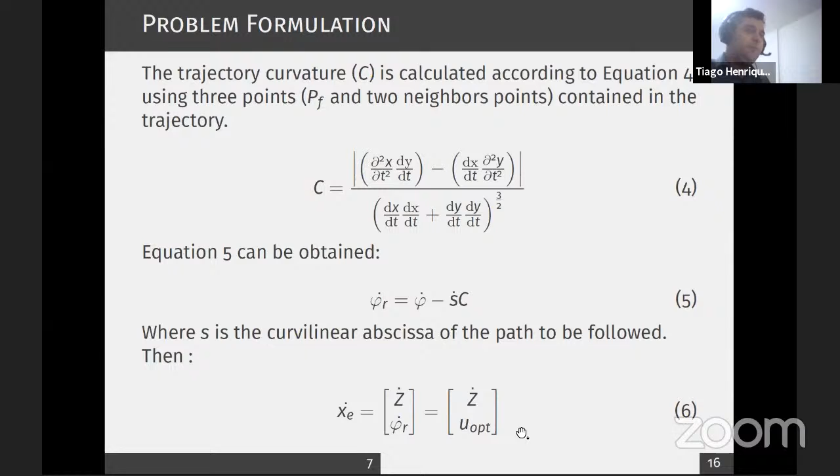Mixing them together, we find equation 6: xe dot and z dot as stated before in equation 3, combined with equation 5. We call phi r dot UOPT, which is the optimal value from the optimization problem in the NMPC controller, and XE is the state error vector.

Rearranging the equations, we find equation 7, the main controller. We use this equation to obtain R, the control action variable, which we send in each iteration. That is the methodology utilized here.

Three control approaches will be evaluated in this paper: the NMPC plus PID, the NMPC standalone, and a classical PID alone. The problem in this case consists of a particular case of an optimization control problem, as stated before.

In this paper, we choose constant velocities of 0.4 and 0.7, and also a variable velocity profile, where we utilize the curvature to estimate the better velocity for that place.

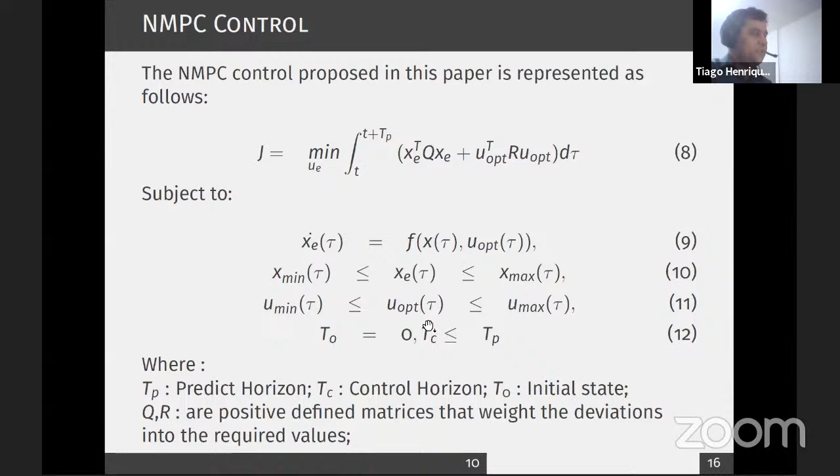This is the NMPC control proposed in this paper, and we minimize equation 8, where Q and R are the positively defined matrices for weighting deviations. The most important parameter here is TP, the prediction horizon, which needs to be larger than the control horizon, since the control horizon needs to be smaller than the prediction horizon. Everything is subject to these constraints, and this is the optimization problem from this paper.

The control scheme proposed, the NMPC plus PID, utilizes sensors only from the UAV and information from the camera for localization: Z, H, and phi r. The NMPC block has the optimization together, UOPT, and it sends the R variable back for further evaluation and to the PID, which will smooth the control actions and send it back to the UAV.

In this case, we calculate two adjacent points and the curvature for the movements of the NMPC. We also introduce windows using the upper part and lower part of the image, utilizing the standard 0 which can be found there. But in certain controlled places, the standard 0 can't be found in the center, so we utilize the portions above and below, and use points to calculate a virtual trajectory to overcome the problem of the standard 0 not being found.

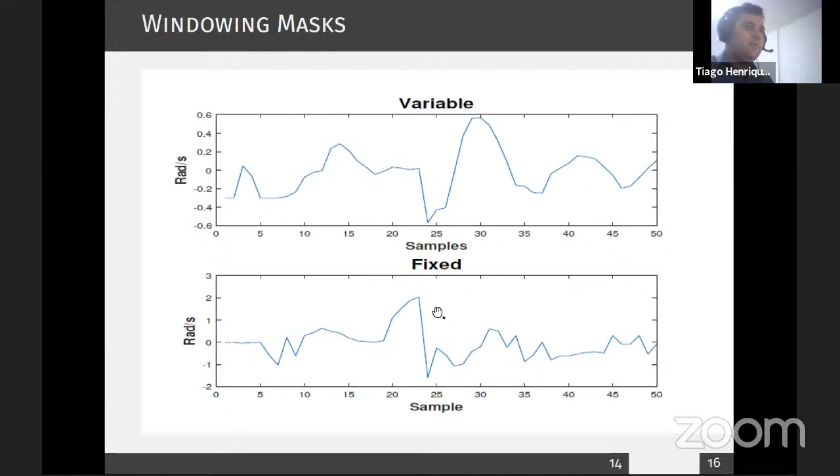For the results, the variable windowing, like stated before, gets small variations on the same error, like 0.6, and the fixed got 2 or almost 1. It's a big error. And for the control comparison, we utilize the mean squared error and IAE.

But it falls on the TV indicator, and the lower the TV index is, the better for noising and other problems. NMPC plus PID has a high amount of TV index. We need to overcome this problem in the future. And that's the control comparison stage.

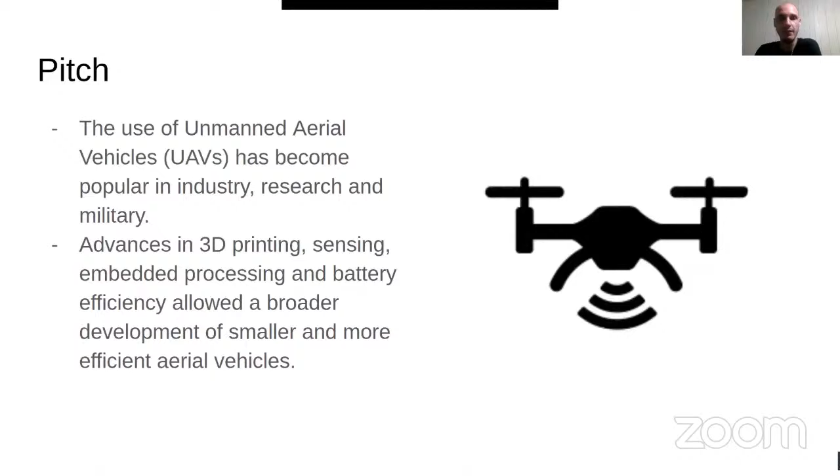Recent advances in 3D printing, sensing, embedded processing, and battery efficiency allowed a broader development of smaller and more efficient aerial vehicles. Nowadays, most UAVs are designed to operate in outdoor environments, being fitted and dependent on accurate GPS data feedback. They ended up being often manually employed by some kind of external operator. A failure of communication with the vehicle to send or receive commands can result in loss of data, inaccurate navigation, and even possible crashes.

In this work, we propose a visual-based UAV with embedded online intelligence capable of maintaining stable flight, navigating, and locating itself in indoor environments. With our approach, there is no need for any external operator or any kind of offboard processing. We evaluate our vehicle in a real indoor environment that simulates an oil platform environment.

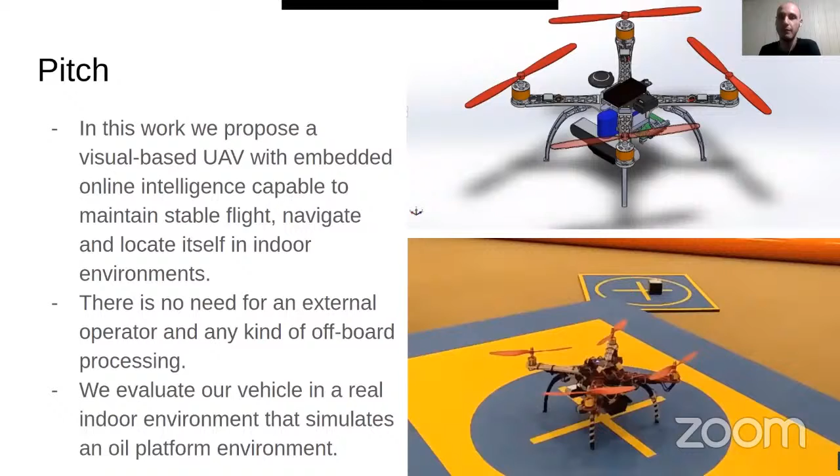The hardware setup: our vehicle was designed to have all processing embedded in it. The idea is to avoid any kind of use of external processing. We used a quadcopter-based frame of 45 centimeters diagonal, with propellers of 10 inches and motors of 1000 kV. We used a Pixhawk flight controller as our main flight controller.

We used the ZED stereo camera to perform the visual inertial odometry. With this camera, we get the visual pose, which we use as the main pose in our vehicle. We also used a monocular camera to perform detection, pointed to the ground, so we could detect things on the ground.

We also used the Jetson Nano as our onboard computer. With this computer, we did all the processing embedded in our vehicle.

The software setup: the first step was to change the Ardupilot source code. Ardupilot is a framework for aerial vehicles. We compiled a firmware version of Ardupilot that uses visual pose instead of GPS. By default, the Quadcopter session of Ardupilot has the GPS feedback as the main information to define the pose, so we changed it to use the visual pose that we get from the ZED camera.

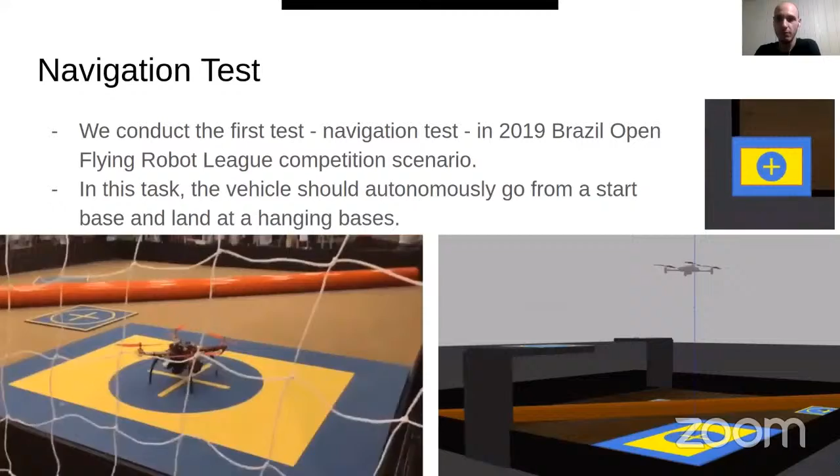We conducted 2 tests to evaluate our vehicle. The first test we called the navigation test. The idea is that the vehicle should autonomously go from a starting base and land at a hanging base. This environment used was the 2019 Brazil Open Flying Robot League scenario. The GIF below shows our vehicle in the real scenario performing this task, going from a start base on the ground to a landing base.

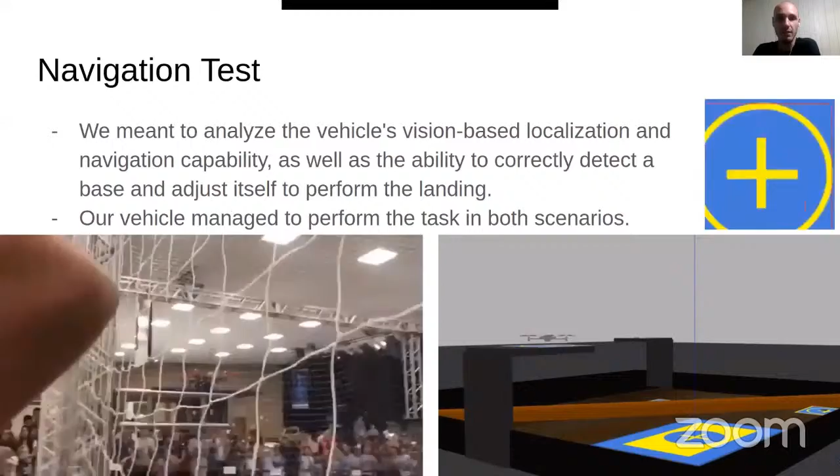The figure down right shows the simulation in the Gazebo simulator of this test. The idea is to analyze the vehicle's vision-based localization and navigation capabilities, as well as the ability to correctly detect a base and adjust itself to perform the landing. As you can see in the GIFs, our vehicle managed to perform this task in both scenarios.

We did a second test. In this test, the vehicle should detect the information displayed by a simulated gas sensor placed in a landing base. So the vehicle should go over the landing base and read the sensor's numeric information using its camera pointed to the ground.

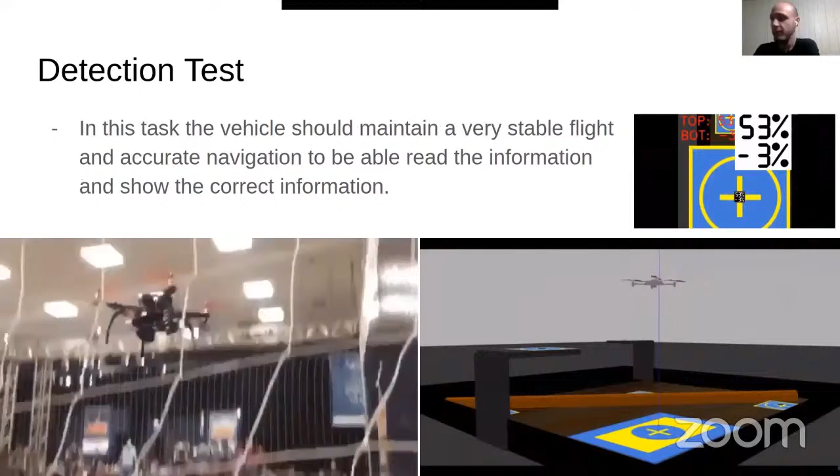The idea is that the vehicle should maintain a very stable flight and accurate navigation to be able to read the information and show the correct result. The figure down left shows the test in the real environment, the competition scenario, and the figure down right shows the simulation scenario as well.

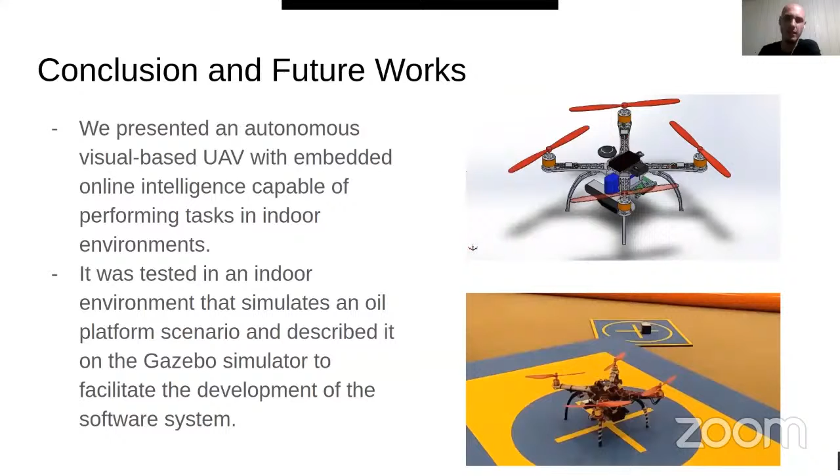So, conclusion and future works. In this work, we presented an autonomous visual-based UAV with embedded online intelligence capable of performing tasks in indoor environments. We tested it in an indoor environment that simulates an oil platform scenario, and described it as well in the Gazebo simulator to facilitate the development of our software system. All the software system we developed was based on open source frameworks like Ardupilot, for example, or even Mavros.

Our strategy, the vehicle and the system that we developed was employed to win the 2019 Brazil Open Flying Robot League, or Desafio de Robótica Petrobras, in the 2019 Latin American Robotics Competition. We won this competition among 11 other teams from all over the nation.

As future work, we aim to improve the robot's embedded system to increase the overall processing capability and the vehicle's autonomy. Thank you for the attention.

Thank you, Ricardo. Congratulations, your work is very interesting. I really like it.